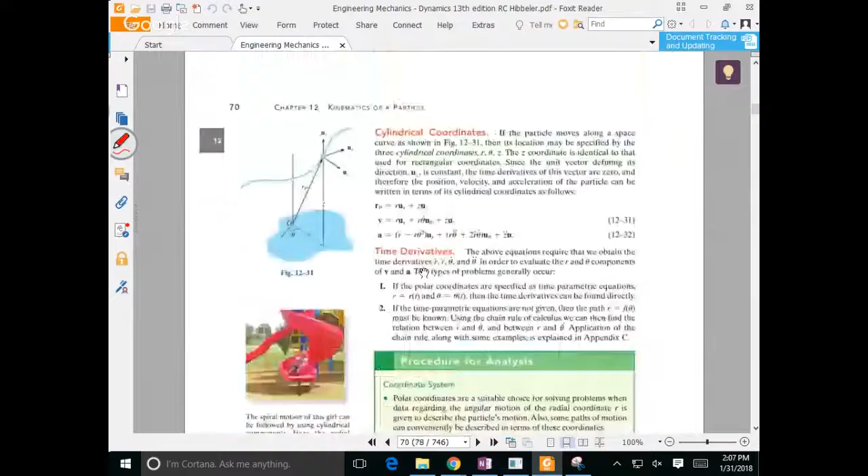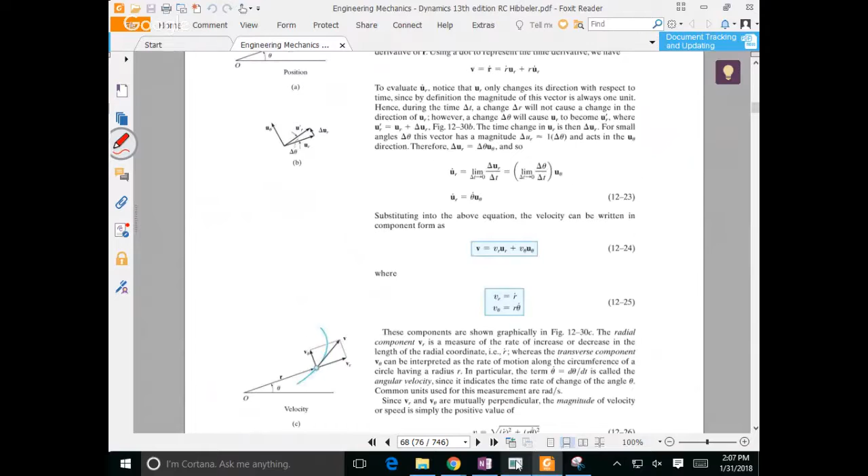So since I sort of hen scratched already on this, I'm going to kind of go through this. Of course, I'm going to work this problem in a minute, but if you look back in the book, back around in here, he's deriving everything. And what he does is this weird way of deriving. He starts here and then out pops this. And it's okay, I guess. But for me, I like to see it a little bit more rigorous.

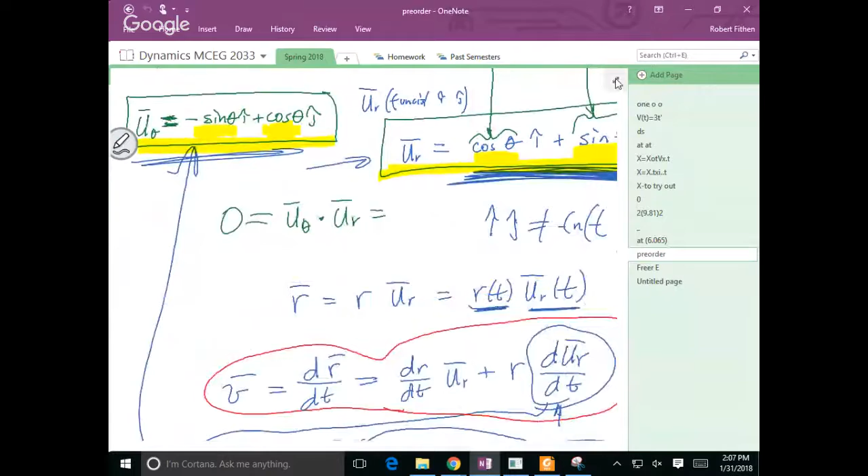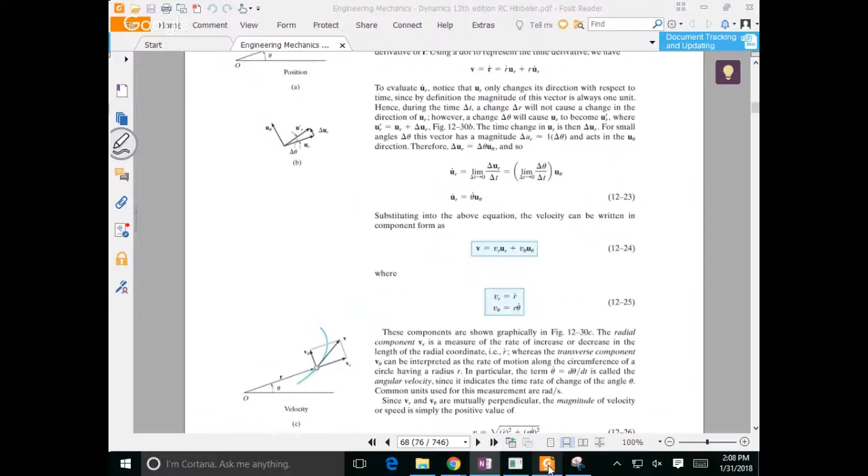So what we had done is we started the other day with this one, in which we showed that these two relations are basically the change. So if you think about it, the time derivative of the base vector that points in the r direction, or out towards it, is just theta dot times that. And what he's doing in the book, and I guess it's okay, does it kind of like this.

Here's the base vector, this u_r pointing out this way. And then an instant later, it moved a little bit. And so he's saying, okay, the change in r is pointing in the same direction as the theta. And then he comes up and does this. What he's doing is saying, it's okay, believe me, this is what it is. And he shows a little vector, and it's just enough so you can believe him.

And he is right. What he's saying is the time derivative of u_r is theta dot times the base vector in the theta direction. He should do that again with the other one, and I don't see it, but it's okay. So what we did is the same thing, but we showed it mathematically. So mathematically, those are true right there. The rate of change of the base vector pointing away is theta dot times the base vector that way.

The change here points back towards the r, because if you think about it, if it moved like that, it's moving back towards the r. And so it's a minus times that.

They're trying to sell me something. They're always trying to sell me something. Maybe it's a lottery ticket.

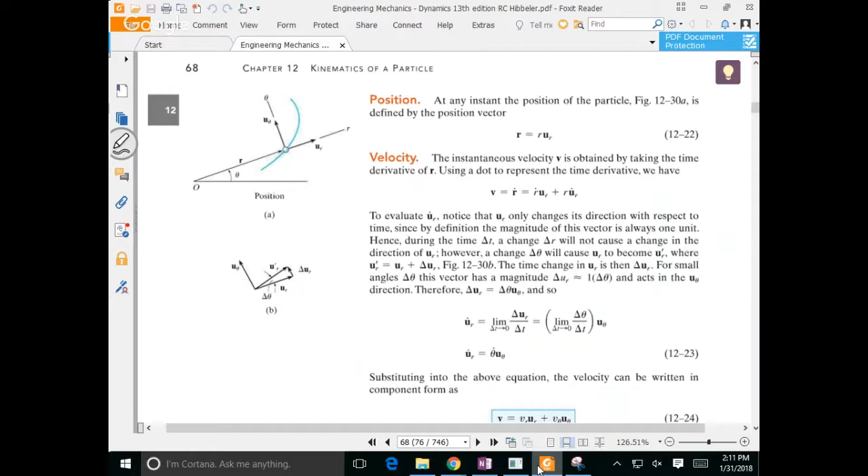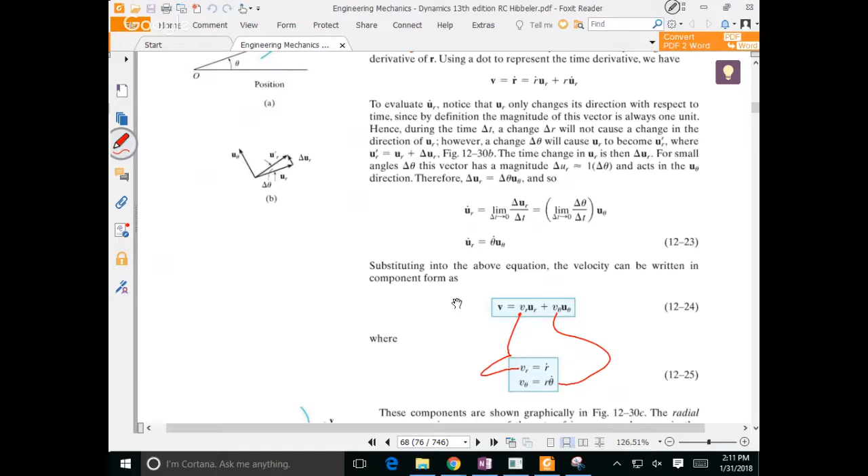So what we did is we took this, gave us this from, let's see if I can cut it from that equation. And so this is the same equation that sits over in the book right about here. So if you look at it, the R is that one, the theta is that one. If you look back, that's the same thing we have right here.

Then the next thing is awful in that you're trying to take the time derivative of the velocity to give you the acceleration. So what do you do? You take the time derivative of this term times that one, plus that one times the time derivative here, plus the time derivative of this one times these two, plus this one times the time derivative of that one times this one, plus this one and this one times the time derivative there. So the only oddities we have are these two, which we have to relate back over here, and we just copy them down.

Okay, so this gets copied down. This one gets copied right here. This one gets embedded in a couple of them. There's a square term here and this one. Then if you stare at them enough, you might have an R term here and an R term here, and you gather them, you'll realize that you're gathering similar items. You'll realize also that these two repeat exactly the same thing, and end up with a 2 down here. So when you're looking at this thing, you're thinking, oh my gosh, it's nauseating, it's huge. But in implementing it, it's pretty easy.

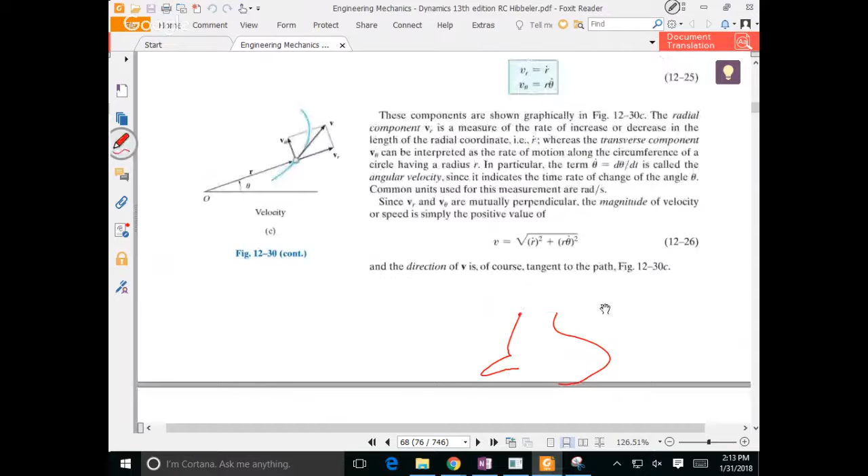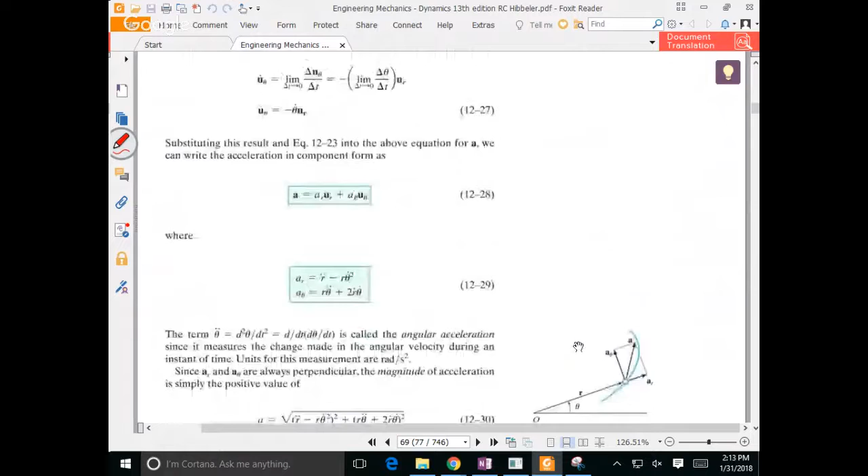So let's double check, look back at the book. Select all. Trash can. You look at the acceleration, you see something like this, where the R component is here, the theta component's here. Let's double check ourselves. R double dot minus R theta dot squared. R double dot, R theta dot squared. And you come over and you see R theta double dot plus 2 R dot theta dot. And you see R theta double dot, 2 R dot theta dot. And that's where this comes from.

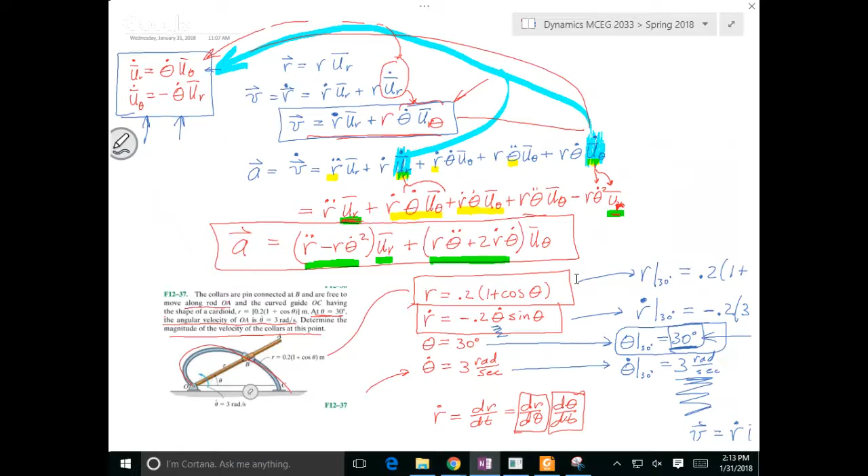Now, what do you have to do to implement it? It's not near as bad as it seems. It's just a lot of equations. And so what I did last time is I worked this problem. So I'm going to go over it real quick, and then I'm going to work another one.

So here's a problem where they say the collar is pinned and connected at B, so it slides along here, and this little rod goes. Okay, let go of that thing, or I'll break it. This guide is something called a cardioid, and there's an equation to it, kind of like a spirograph. And then you slide it, but he tells you at 30 degrees, the angular velocity is that. So that's the speed of this rod. Determine the magnitude of the velocity of the collar at this point.

Now, if you look back at the velocity, all you need to know is r dot, r, and theta dot. This one you do need to know because he's probably going to tell you what the angle is. So you need to find this one at that angle, this one at that angle, and this one at that angle. And you put them into that equation, that gives you the answer.

So the first thing I did is I just copied the R. Then he says I need to find the R dot, dr/dt. But I don't have the R expressed as a function of time. I have it expressed as theta. So you do this little chain rule thing. You take that one, you realize that one is exactly this one. That's what he gave me. So I can just copy it down underneath there.

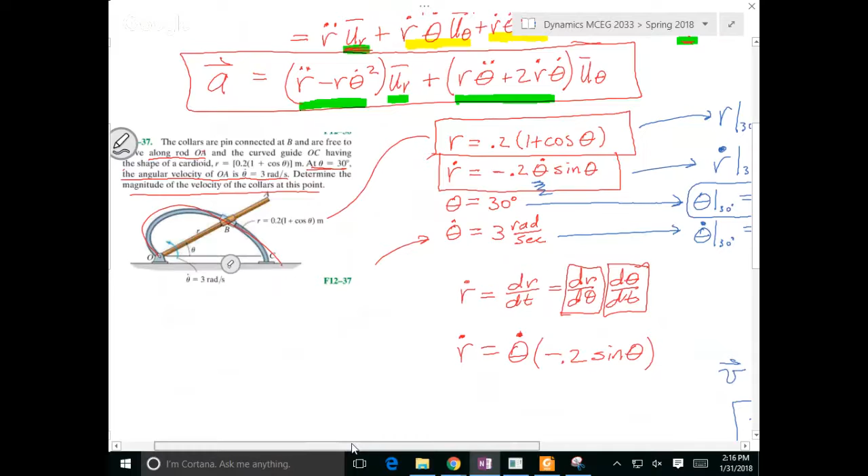My handwriting's not great. I need to know R dot at 30. So I took that equation, put in the 3 that he told me, took the sine of 30, and I got that number. Now, all I do is I just go back and fill it out. I look up here, I read R dot, I put it right here. I go up here and look at R, it's that one, times theta dot, which is that one, and then I multiply those two and I get this. We looked in the back of the book and it was minus 0.3 and 1.12, so it turned out it was okay. That's all you're doing, you're just filling in.

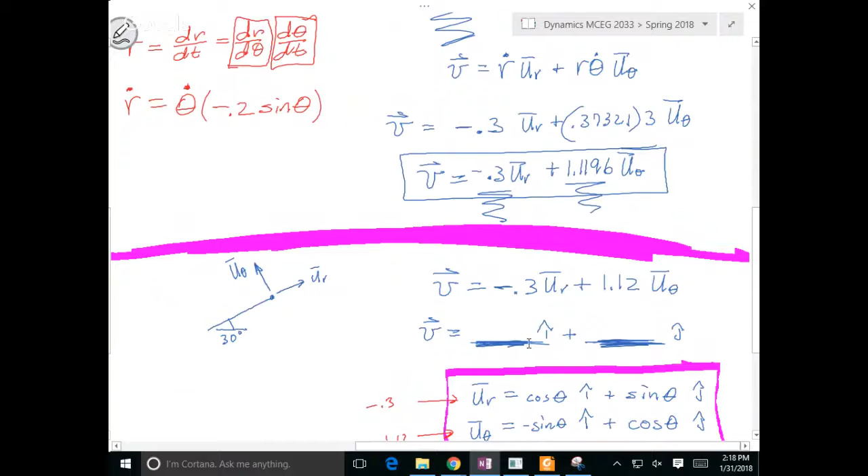The next key, and this is something that he didn't ask, that I think is fairly important: I did a little purple line right there, and then this is like a new problem. If someone came in and said, here's a vector, v equals minus 0.3 u_r plus 1.12 u_theta. Theta is 30. What is this number? And what is that number?

And I'll tell you this, every single test I've given in dynamics for the last 2 years, I've done something like that. I don't tie it to the end of another problem, because if you mess up the calculation above the purple line, then by nature you're always going to get this wrong. You can't disassociate those. So the way I generally do it is I put something like this: V is equal to that. Theta is equal to 30. What's i and j?

Now, it turns out if you take the base vector like we did, 2 slides back, I have this u_r. It's actually equal to cosine theta i plus sine theta j. And then this is minus sine of theta i plus cosine of theta j. This is commonly used as just a simple transformation. This transformation exists pretty much everywhere when you're transforming between 2 coordinate systems that are orthogonal and the base vectors are of length 1. So it's always the case.

Is it showing up? It's not showing up. What's going on here? Okay, let me hit enter a couple times. What's going on here? Okay. Let's try this. Clear. Okay. Okay, we'll just start over. That was weird. I mean, it was right there. That I don't understand. Okay. This is kind of, I probably shouldn't even do this.

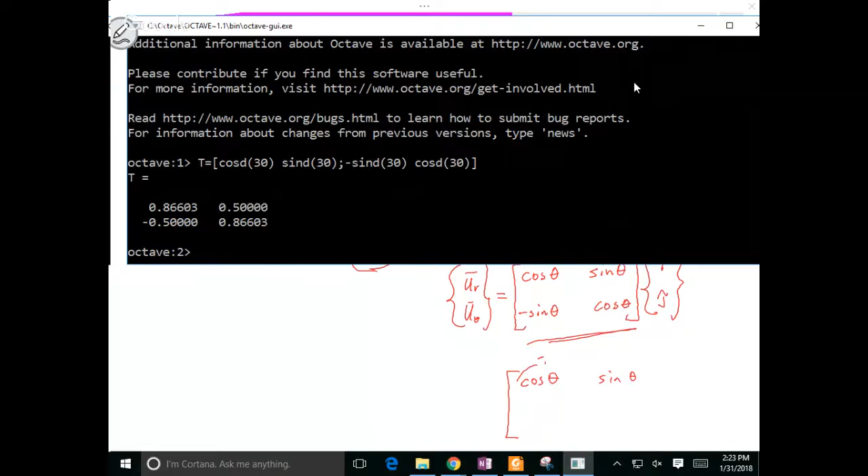Cosine degree 30, sine degree 30, and minus sine degree 30, cosine. Ta-da. Oops. Did I do it? Watch this. Inverse. This is what I was talking about last time. It's always the same. It is the transpose of the one above it. And so it's easy. It's a standard. It's something that always occurs, which means it's easier to transfer from and to this.

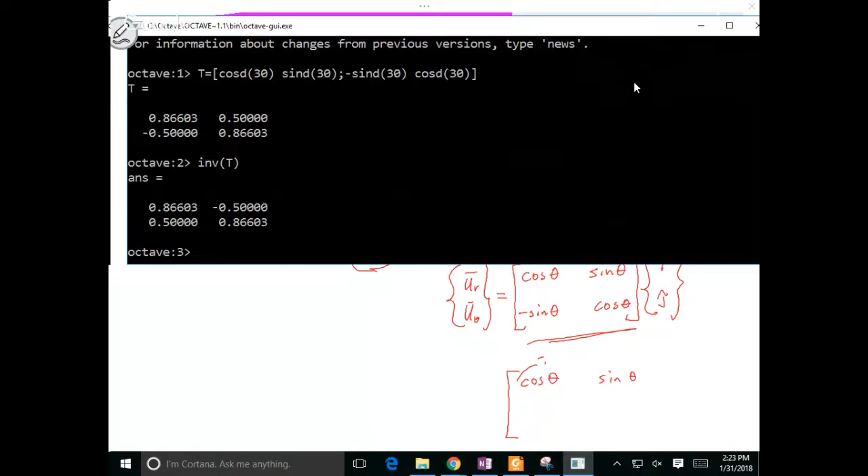But for lack of a better thing, if you were given this, I think at this point I would just take this and multiply this equation times that, and this equation times that, and just add them up. And that just gives you, well, that really stinks. I don't like that.

So, let's go back in and start working our problem. I don't know what happened there. Anyway, a peg is driven by a forked link, OA, along a path described by that equation right there, where R is in meters. Oops. Okay, so here. Is it working? Yeah. I think that's 90 degrees, but we're going to use it as it is. The link has an angular velocity and an angular acceleration of that and that. Determine the radial and transverse components of the peg's acceleration at that instant.

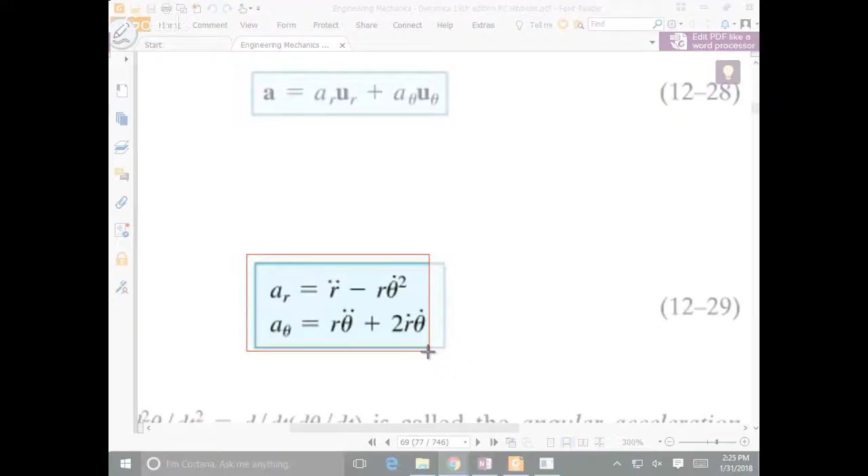Now, if you're looking back, there's two places we could find this. One is I could just copy that, or I could go over, but you know what? That's so compact and so quick. I think I'm just going to copy this one. What I'll do is trash can it and then just copy the little equation right there. You can't beat it as far as being compact.

So there it is. From looking at just this equation, I know that I need to know R, R dot, and R double dot. I see a theta dot and a theta double dot. You don't see theta in here, but it's implied you're going to have it. So first of all, let's do the easiest thing first. I know these two. Radians per second squared. All right, we're good. This, however, is functionally this, e to the theta. What's R dot? Let's monkey around with this a little bit. Maybe I'll do it over here.

So dr/dt equals dr/dθ.

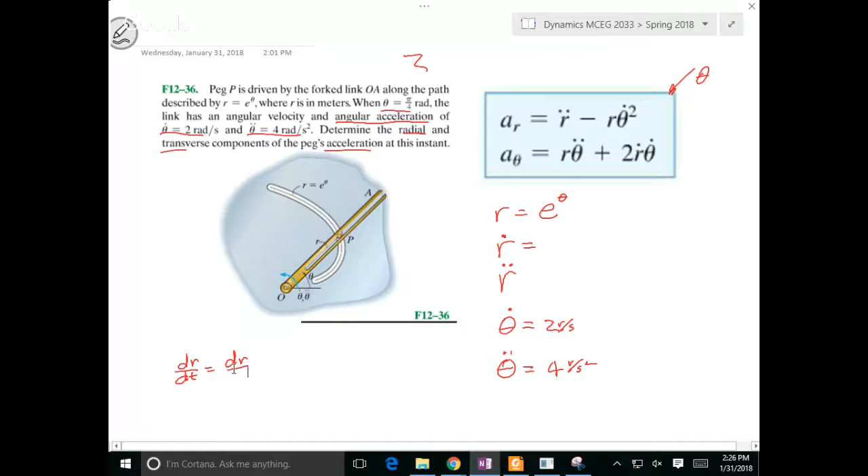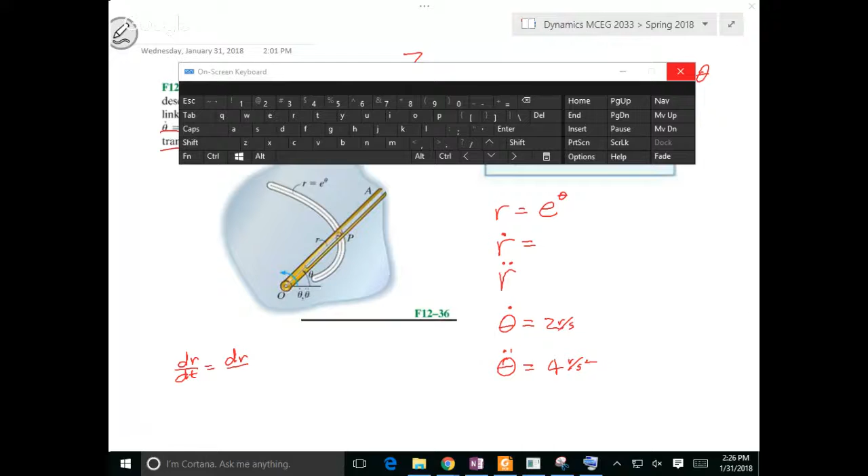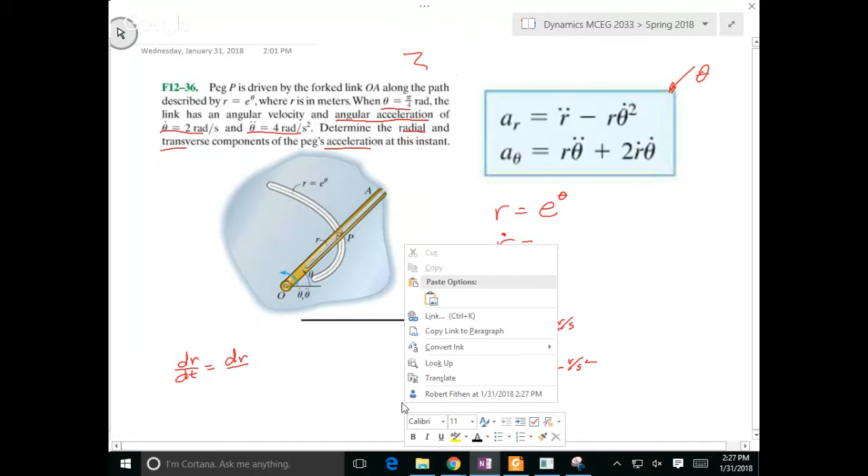Oops, I pushed that button. Okay, go away. What do these buttons do? Oh. Okay, go away. Hey, I didn't know I could be typing stuff in that. Okay, what does this one do? Uh-oh. We don't want to do that. Hopefully that goes away. What does this do? We don't want that. Close. We don't want that. Okay, so the keyboard was useful. The other one was not. Your next screen press will be a right click. Oh, okay. So what does this one do? Okay. Oh, anyway, the palm of my hand hit that thing.

Okay, times dθ/dt. So it's nothing more than theta dot times dr/dθ. If I remember my math, what is that? Is that e to the theta? Isn't that what that is?

It's supposed to be. Okay, so this kind of means that this one would be this. What would that next one be? Would it be this? Or is there something else, though? Is that it? Okay, let's think about that. Wait a minute. Is theta a constant? It's not. It varies with time, right? So let's see how we would do that.

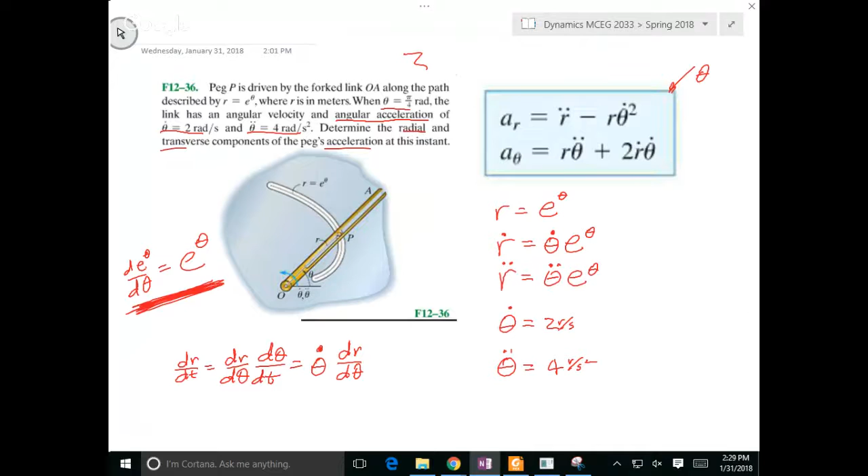Let me scroll down. So how would we do dr dot dt? Okay, so if we wrote this in, it looks like this. So I think the first thing is I would have this like I had over there, e theta plus this. Wouldn't I have that? And see, I contend, maybe incorrectly, but I think I'm okay, that since theta is a function of time, I have to do that.

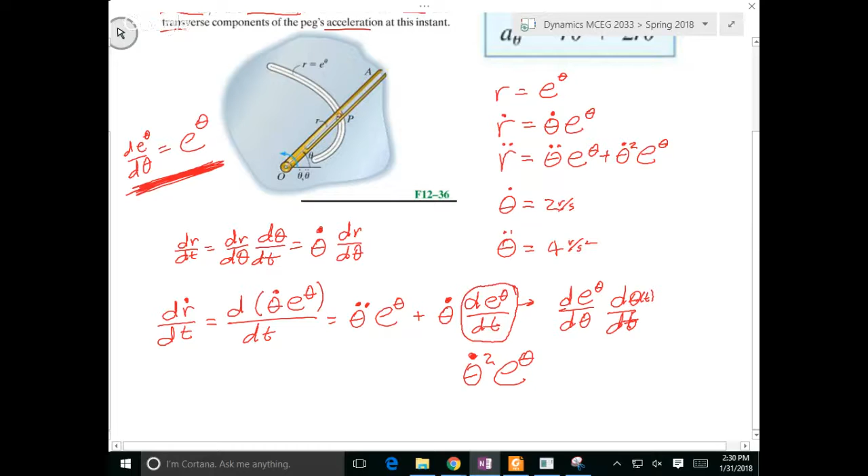So I have to do this squared e to that. So I think it's that squared e to this. Just out of curiosity, let me roll forward up. I mean, it's the F1236. So you'll have to remember what that is when it's time to find the answer.

So now what I need to do, I need to come over to right here, and I need to find r at theta equal pi over 4. I need to find r dot at theta equal pi over 4. I need to find r double dot at theta equal pi over 4. Okay. You would think this guy would do, but he's given me something that, okay, well, I can do this, but I'm not pleased about it.

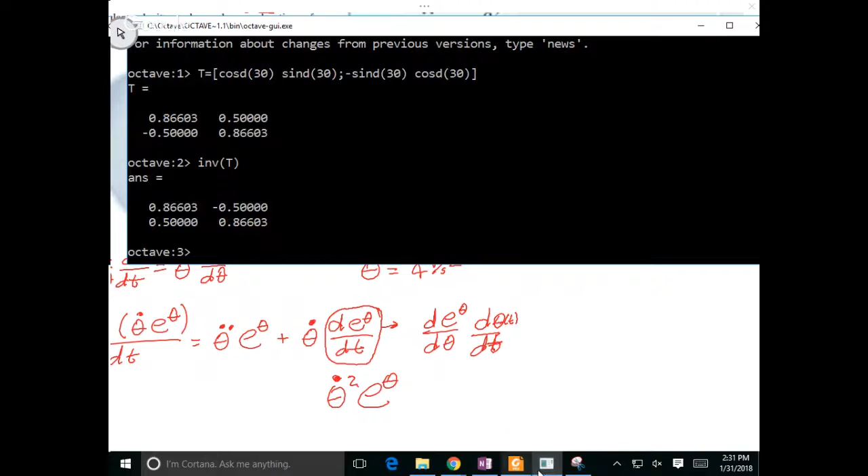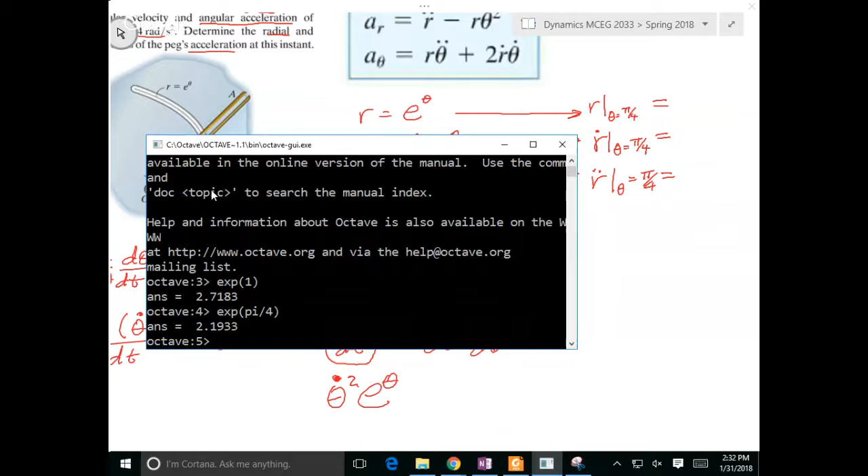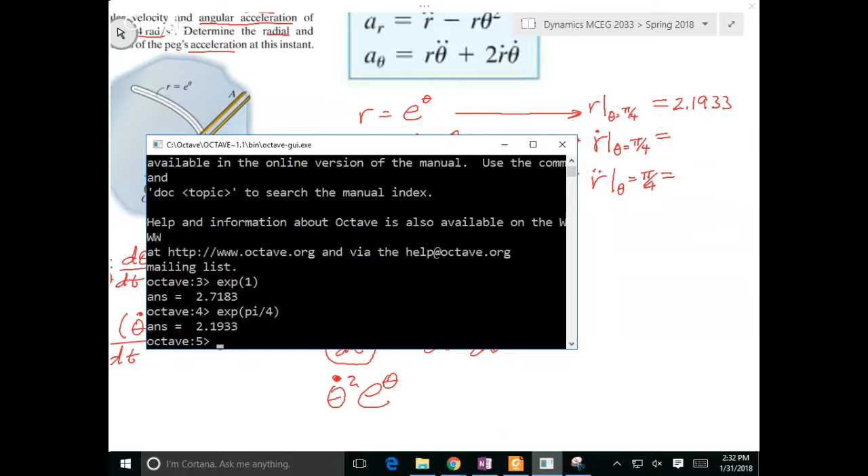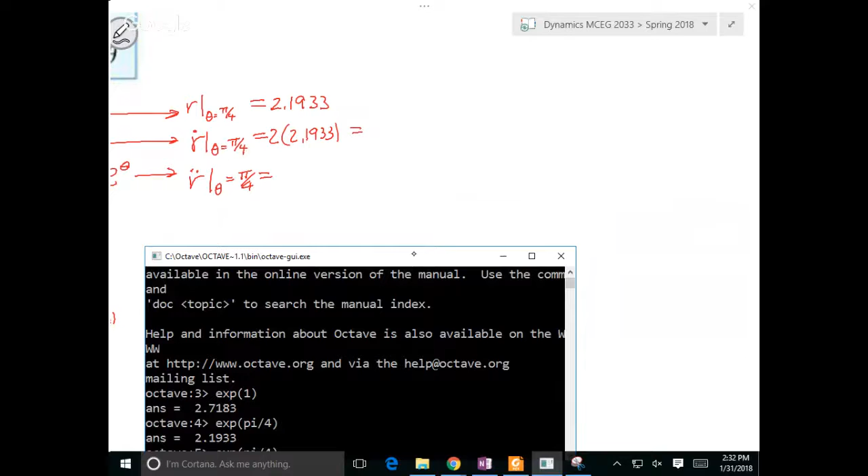Okay, is it EXP? Is that the thing? Oh, yeah, I know that. EXP of 1. Yep, that's it. Okay, now pi over 4. So there's my first one. 2.1933. And any more digits I'm not interested in. Okay, now the next one is that number. If you think about it, this number right here is right there. And as a result, that becomes 2 times 2.1933. Where'd it go? 2 times that number, 4.3866.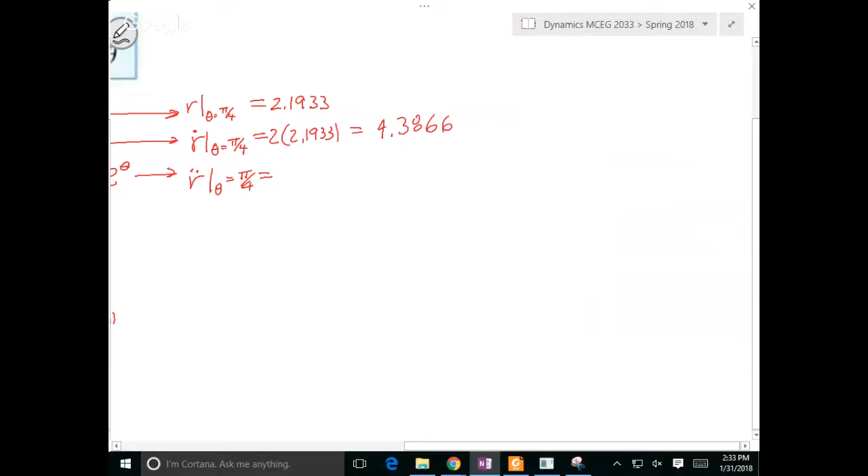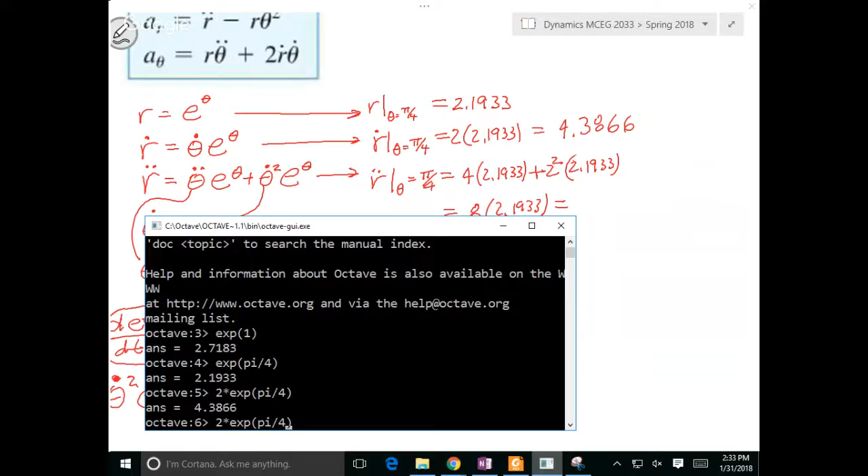Now what I've got is even something nastier. I've got 4, because I got to get this from here. I got to get that from here. Times 2.1933 plus 2 squared, 2.1933, which is the same thing as 4 plus 4, 8 times 2.1933. Is that right? I think that's it. 17.546. Okay.

So what do I have? I've got my R, my R dot, my R double dot, my theta dot, my theta double dot. I can just fill it in now. So I move this just enough up there so I can read this equation. I'll just write it like they say. R double dot, which is 17.546, I'm basically saying the radial component, times theta double dot, which is 4, plus 2 times R dot, which is 4.3866. Okay. That's annoying enough. What did I just do? I'm doing something wrong here. Okay, let's try this again.

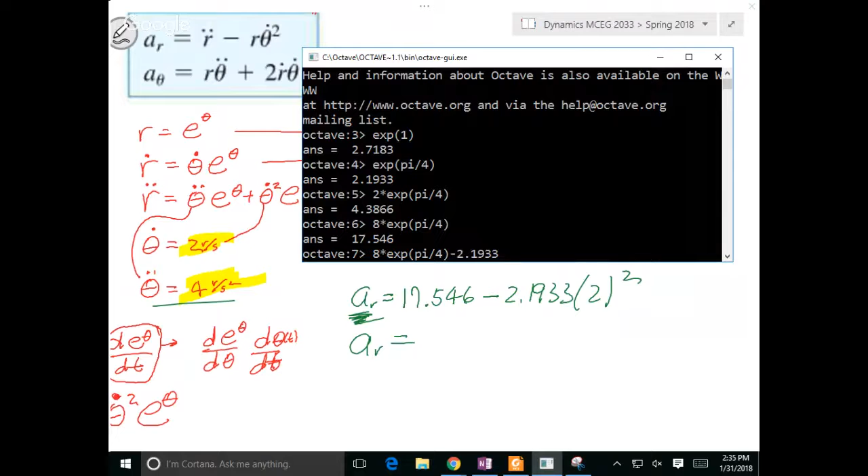R double dot minus R, 2.1933, theta dot squared, or 2 squared, gives me a_r equal to, okay, do that, minus 2.1933 times 4, 8.773. Did I do that right?

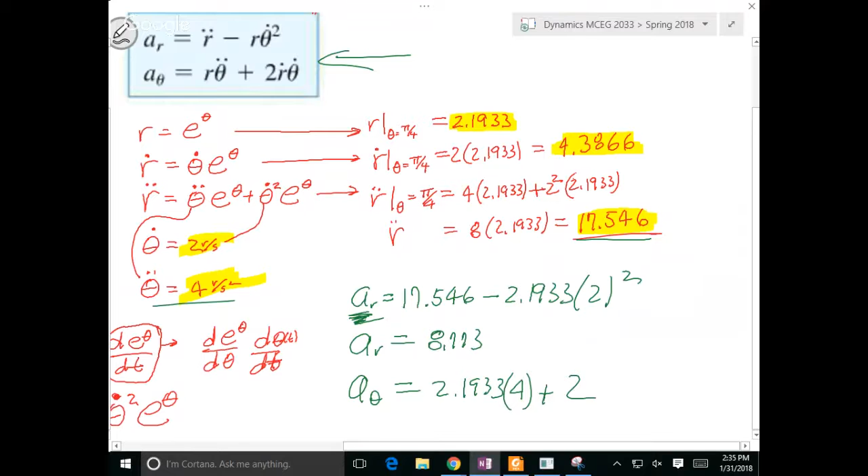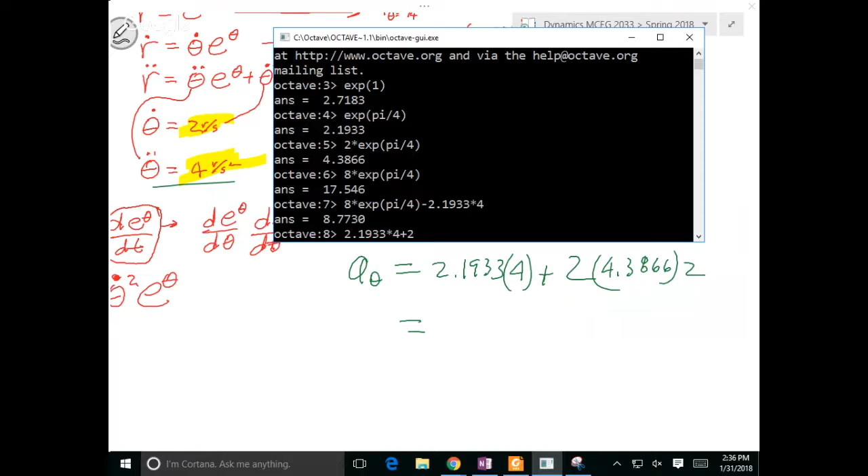A theta, now I can go do this. 2.1933 times theta double dot 4, plus 2 R dot 4.3866 times theta dot of 2 becomes 2.1933 times, not minus, times 4 plus 2 times 2 times 4.3866 gives me 26.32. So if you want to write the acceleration as a vector, it'd be 8.773 u_r plus 26.32 u_theta. If I didn't goof up, that might be the answer.

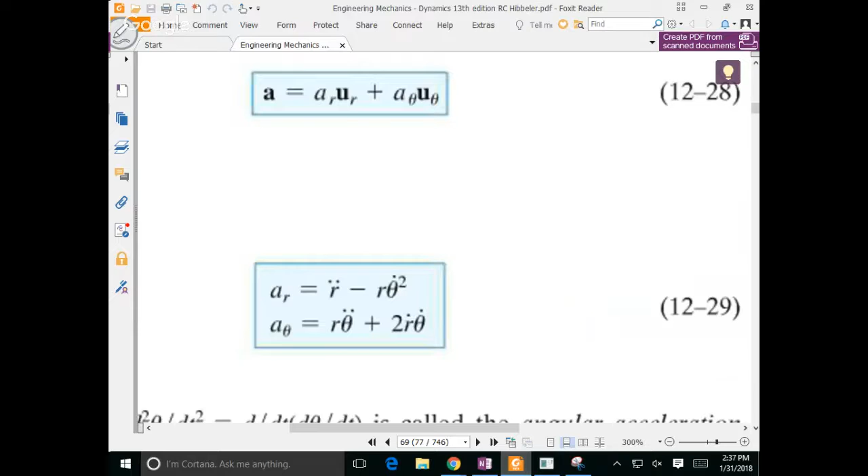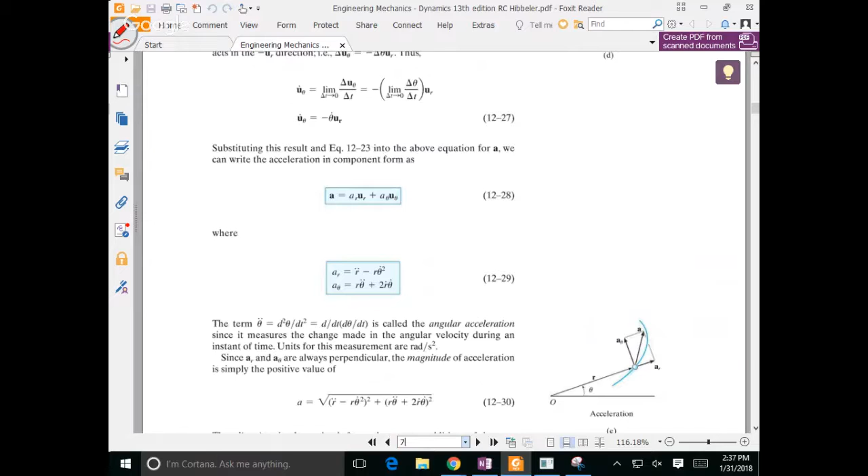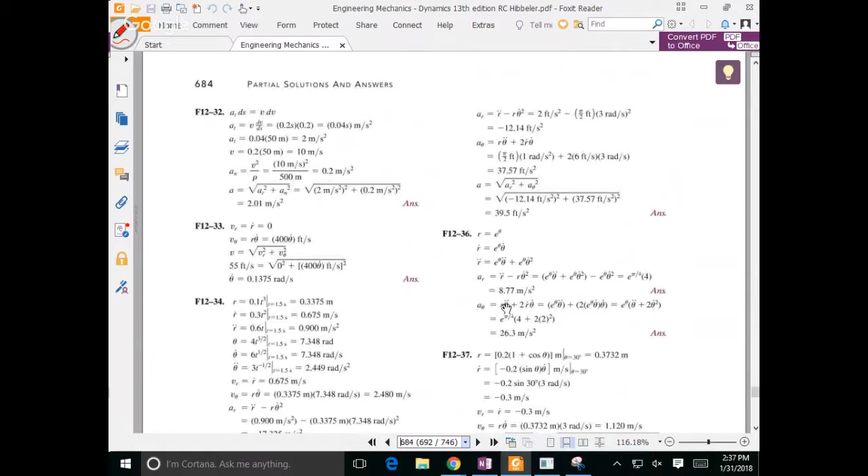Let us see how bad I goofed up. Where'd it go? I'm going to guess the answer is on page 702. Well, not there. Uh-oh. Do you remember the number? Oh, 36. Okay, so something here looks, is it right? Oh, okay, so 8.77 was one of them. 8.77, I got that. 26.3. All right. So it wasn't awful, only slightly.

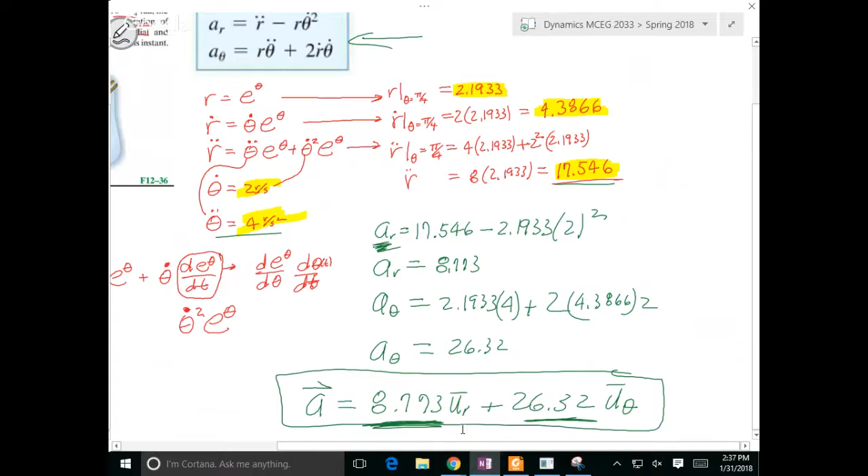But really, when you look at what you're doing, there was a lot of derivation to come up with this thing. But as far as implementing, you just look in your set, and in this case, I'm doing the acceleration, so I have to know R dot, R double dot, theta dot, and theta double dot. If he only asks you for velocity, all you need is R dot and theta dot. And then you're just going through the grind. There's nothing more complex than that. The complexity might be how he does this.

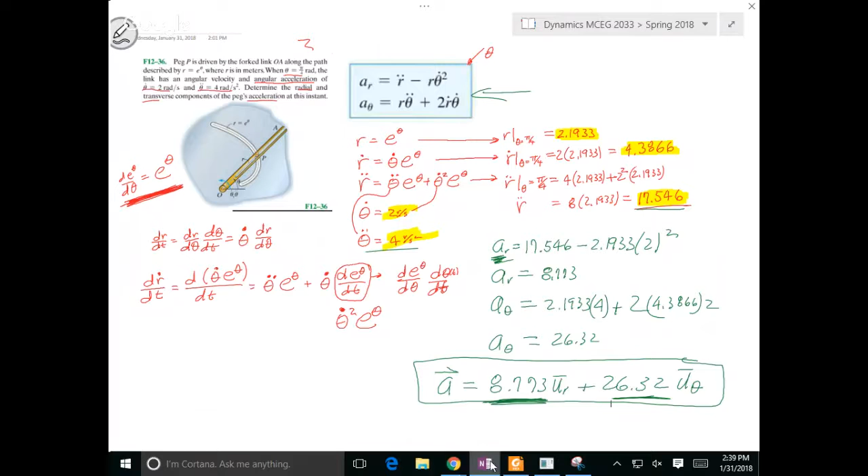I'll show you one that's awful. It's in the book, and it's very weird. But before I do that, does that seem okay? It isn't as bad as it seems unless you're working it and you're stuck, and then it seems bad for a bit. But if you can work your way through those kinks, then it's not that bad. Look at this awful one he's got here. Okay, wait. We were on page 80.

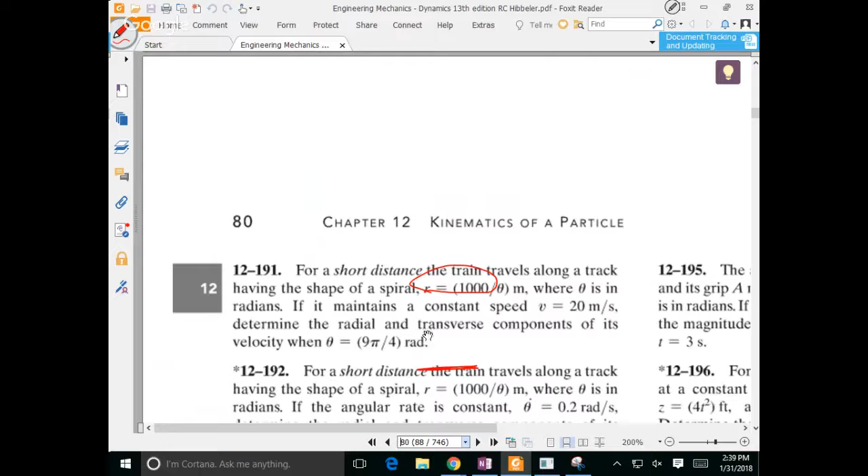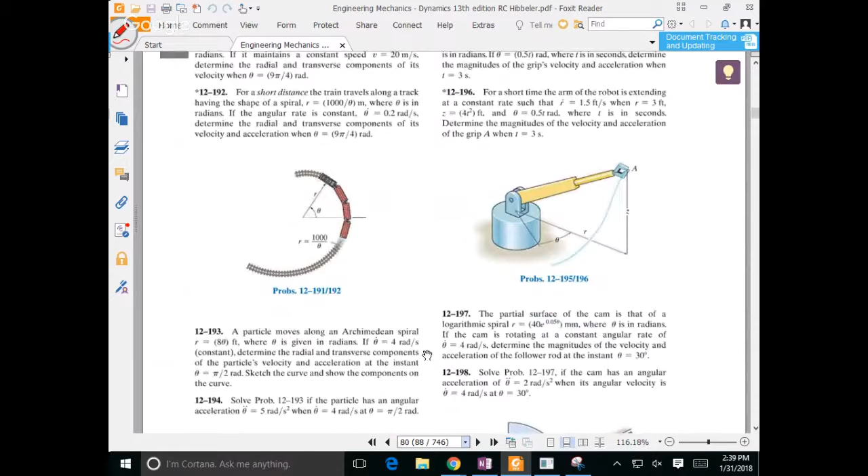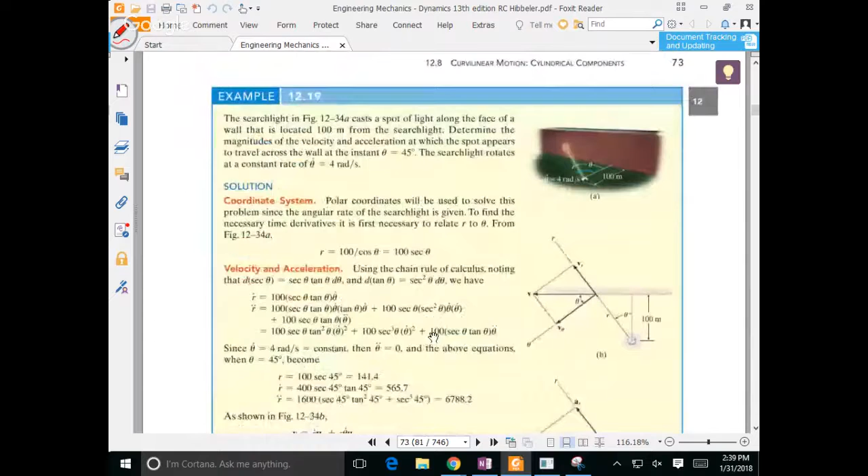Okay, no, we weren't on that page. Let's get rid of that. Okay. Oh, okay. You're probably right. Okay, here's the one I always like to look at. This one is not fun.

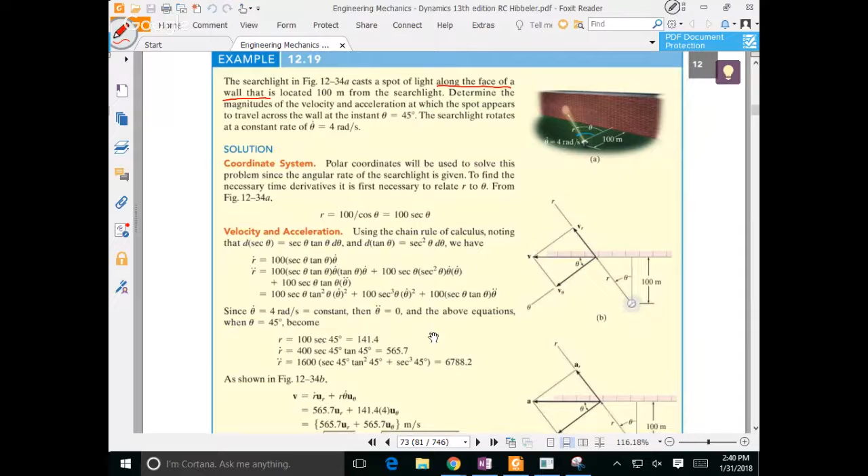Okay, so watch. Here's what you got. And it makes sense if you really think about it. So a searchlight casts a spot of light along the face of a wall that's 100 meters from the searchlight. So there it is. Determine the magnitudes of the velocity and acceleration at which the spot appears to travel across the wall when theta is 45, so he's got that being 45 right here. And then there's the speed.

So that's if the little searchlight's going at a constant speed, like the airport light does. Yeah, exactly. So you look at it, and at first glance, you say, hey, wait a minute, how do you do this? Until he gives you this: polar coordinates are used to solve this problem since angular velocity. The necessary time derivative is first necessary to relate r to theta. And so he does that through kind of this picture here.

So you look at it, and at first glance, you're like, ooh, yeah. But then you realize, here's your r, here's your theta, and that's fixed. It's 100 meters. So you're looking at that, and you're like, hey, wait a minute. Okay, r is a cosine. Oh, but wait a minute. The cosine goes underneath.

Then he says, okay, you have this relationship, right? Now, if it was sine or cosine, it would be a little bit less obnoxious, but now it's not, because you have to use the chain rule of calculus, and this is your r dot. Now, look at your r double dot. Oh, look at all that mess. Now, he doesn't do much except just sort of put it down there for you.

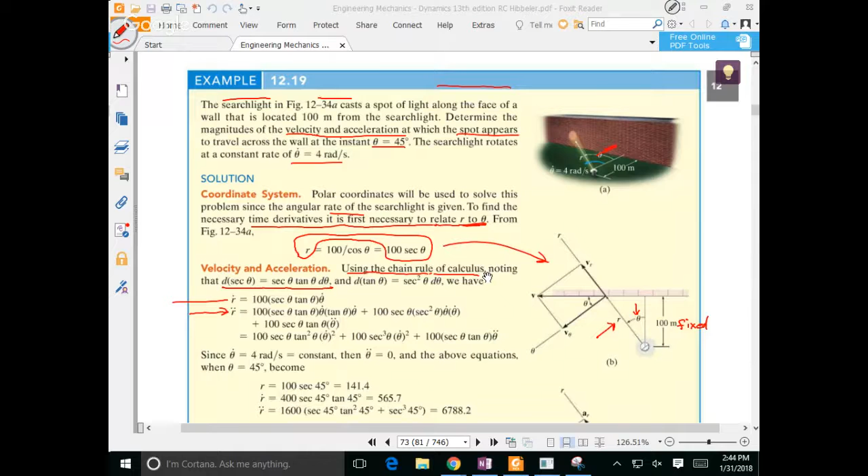Okay, good grief, I don't even know. Well, obviously one of these disappeared. Secant 45 tangent squared 45. Okay, maybe that is 0. No, it's right there. Oh, he took these two terms out, put here. Okay. So you just sort of go through this thing and you find out, I mean, it's awful, but it's not terrible in the sense of what you're doing. You're just simply, here, let's try and see if I can do this.

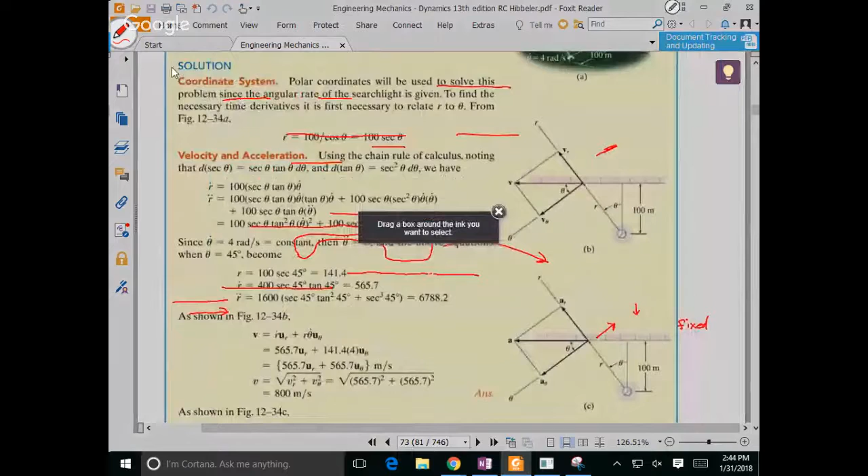Okay. You're just simply finding this value, and this value. You're finding R dot, R double dot. You're finding theta dot and theta double dot. Then you're just plugging them in. So you plug them in here. And of course, he has a component with the u_R and a component with the u_theta. He finds the square root of the squares. It turns out to be 800.

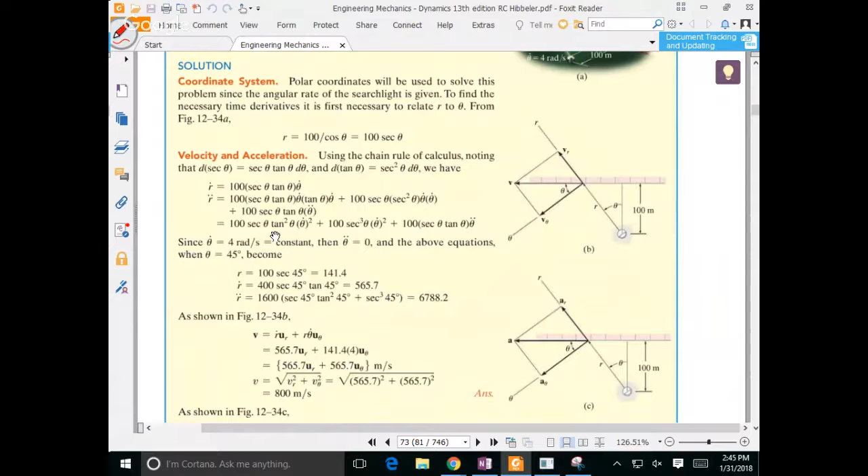And the acceleration's similar, but there's a little extra part. You put in R double dot minus R times theta dot squared. You just put it in right here. You put these in and you go through the process. So if you think about it, you got 6 numbers of which you really need 5 for the acceleration. For the velocity, you only need 3. And that's it. So the biggest part here was this mess.

This part, if you were just given R dot and theta, R double dot, you could just start plugging it in. And once you get all those, you get the numbers. So in the homework, there'll be a couple like that, and you just have to get your way through those, and then you realize it's not really that hard. And that's pretty much it.

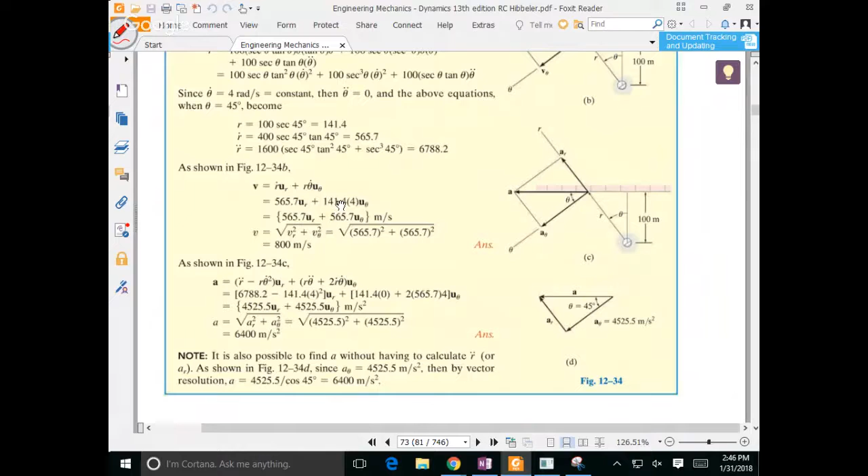Now he's got some nice drawings here. As this thing went, there's u_R and there's u_theta. There's the acceleration in the R. There's the acceleration in the theta, which together make you run down the wall. I thought that was an intriguing problem, but it's also not for the calculus-averse person.

And I'll tell you a little story. I've worked in a lot of places, but one of the places I worked before was the Air Force Research Labs. And what was funny, when you go to work there, they have every piece of software in existence. And we were doing eigenvalues for electromagnetic propagation, which is a 6x6 symbolic eigenvalue thing. So it's a hard thing to do. None of the programs would work except this one. This one was the only one that would work. And it dates back, it's one of the earliest ones. And it's probably more stable than any of the others.

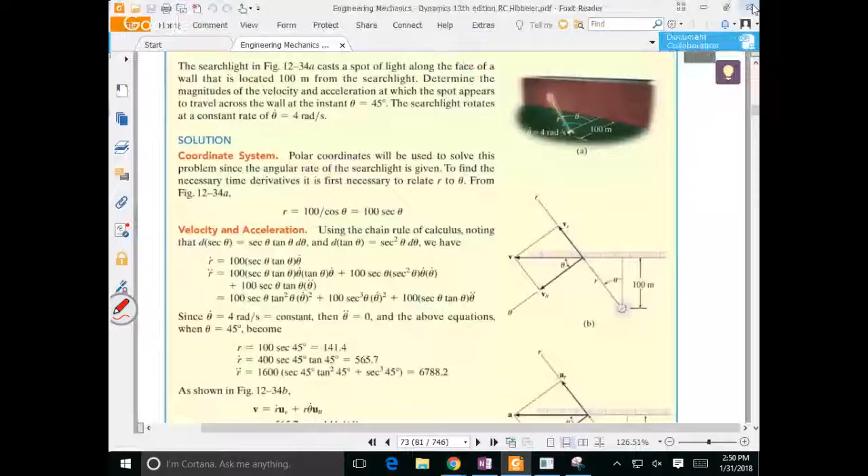Yeah, there you go. Did you enjoy working for the government? Actually, it was a pretty good job. I really enjoyed it. I was around some really good people, and we did some nice work, and everybody just went in, we got it all done, and we went on. There was no fanfare, but it was good.